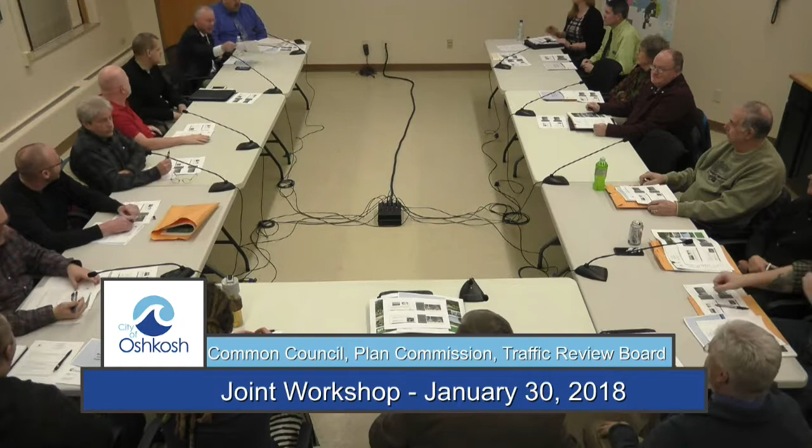James, why don't you kick it off? All right, James Robbie, Director of Public Works. Mark Roloff, City Manager. Jim Collins, Transportation Director. Dan Szynski, Traffic Review Advisory Board. Steve Haas, Traffic Review Advisory Board. Michael Ford, Plan Commission. John Kiefer, Plan Commission. Jake Krause, City Council. Caroline Pansky, City Council. Steve Cummings, Mayor. Alan Davis, Community Development Director. John Hens, Plan Commission. Tom Forty, Plan Commission. Bob Viger, Plan Commission. Tom Perry, Plan Commission. Kathy Prop, Plan Commission. Ross Hohenschneider, Advisory Board. Steve Godey, Assistant Director of Public Works. And Kelly Groyle, KL Engineering.

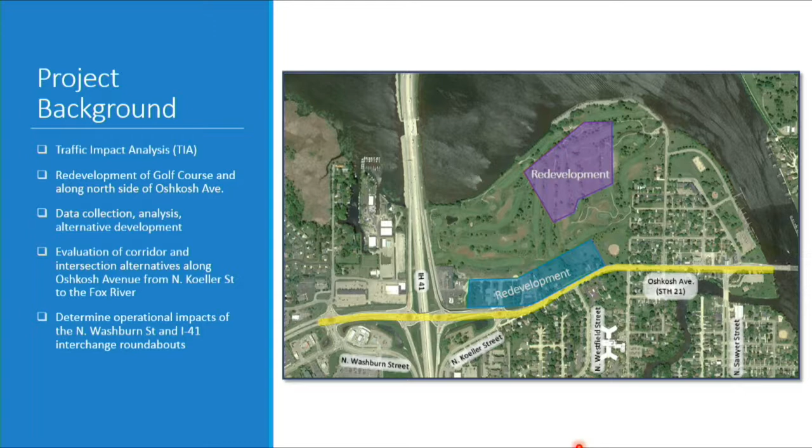In this case, we collected intersection movements or volumes from Washburn all the way to Sawyer Street for the roundabout and signalized intersections. That's why we're here today, to go through some of those alternatives we looked at and get input from you guys. Our focus for this meeting will be from the Koeller Street roundabout to the Fox River. We did look west, but the connecting highway limits are just west of Koeller Street, so we're going to focus on those corridor alternatives and intersections. But if you guys do have questions regarding the other roundabouts, we can address those.

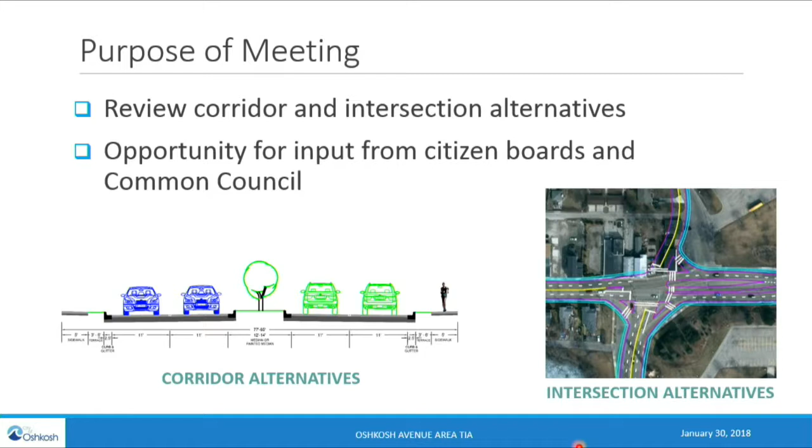So as I mentioned, the purpose is to review these corridor and intersection alternatives that are in your handout and also on the presentation slides, and have an opportunity to get your input and thoughts about them.

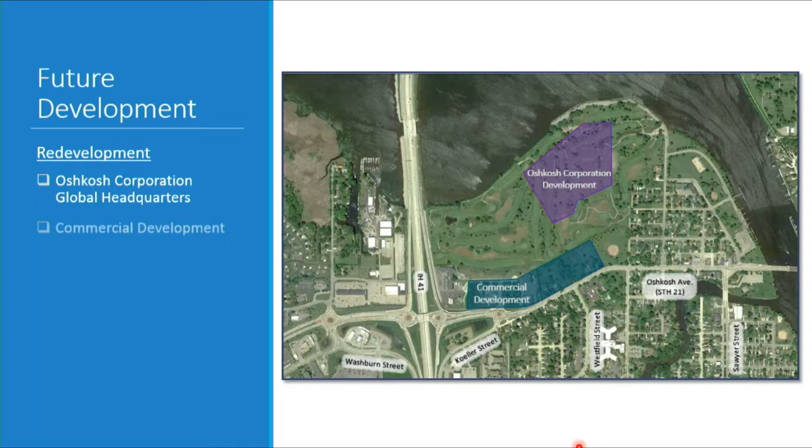To start, just to give a little bit of background, and I think many of you are familiar, the Lakeshore Municipal Golf Course is being redeveloped for Oshkosh Corporation Global Headquarters in part of the golf course area.

There will be some commercial development planned for the north side of Oshkosh Avenue. As part of this, to feed into those development areas, there'll be an extension of Koeller Street and also an addition of a north leg at the Westfield intersection. Other than that, it's not anticipated that there would be any other driveway accesses along Oshkosh Avenue to serve these new facilities.

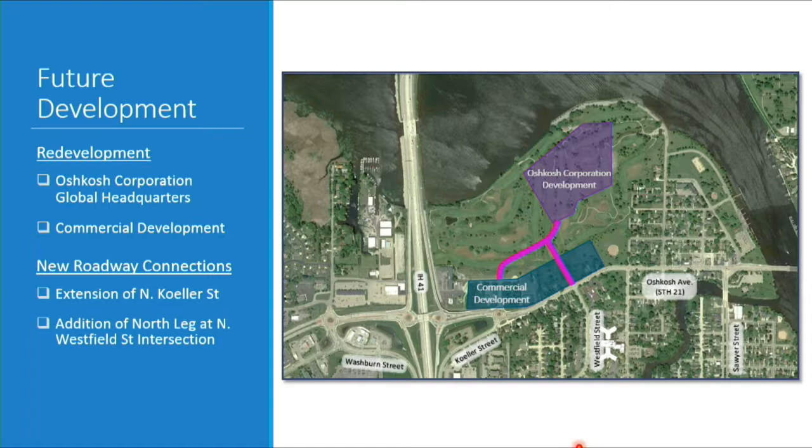To give you a background of what we've done to date, we have worked with East Central Wisconsin Regional Planning Commission to come up with background growth traffic volumes. This would be traffic growth in the area that's not a result of the new development in the northeast quadrant of the interchange—other development in Oshkosh or just the growth of the municipality through time.

So we gathered their data. They have models that help predict what is expected for the future. KL Engineering then looked at the development itself with Oshkosh Corporation headquarters and the new commercial development, and used industry standards to predict traffic volumes that may be generated as a result of this development, and then assign trips to the intersections in the network as people exit and enter these new areas, and how that will impact the roadway system.

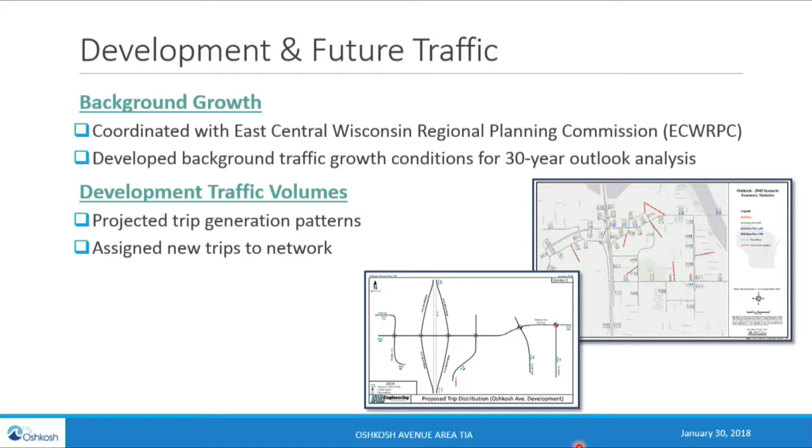From there, once volumes are determined, we do a traffic analysis. We look at AM and PM peak hours, which are generally the highest for the day. We analyze the existing with current roadway conditions and current volumes. Then we looked at development completion, which should be between 2020 and 2025, with some of those corridor improvements, and then the horizon year, which in this case was 2045.

So we modeled with and without development traffic to see what kind of impacts it would have to the roadway system. And as we mentioned, the intersections that were evaluated were from Washburn to Sawyer Street intersection, the signalized and roundabout areas.

Do you have specific times, the peak times that you analyzed? What we did was we had video cameras out there and ran them all day, and what we found to be the AM peak was from 7 o'clock to 8 o'clock in the morning. That's a general figure—each intersection might be slightly different, but for the corridor itself, it seemed to be 7 to 8 o'clock and 4:15 to 5:15 at night.

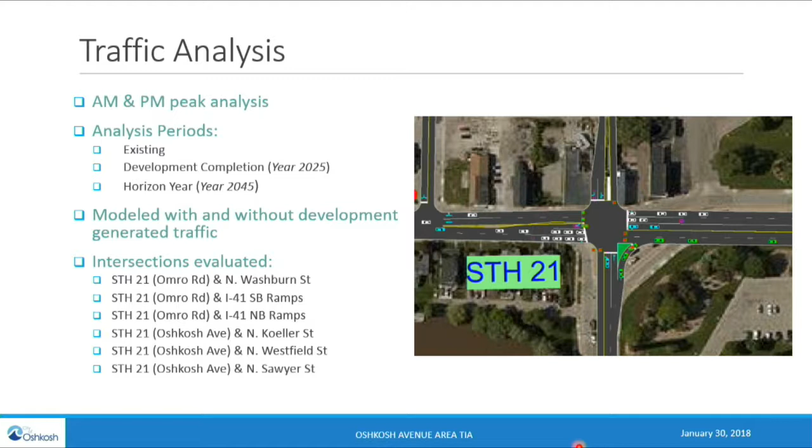So that's the background. Is there any other questions before we dive into the corridor alternatives? Okay.

Before we start here, in your packet handout or on the slides, if you are following along, we provided basically a one-page sheet for each of the alternatives. So if you are interested in following along, this would be page 1 of the corridor alternatives. What I tried to do here was provide an easy way that you could look at the typical section, some example pictures.

I tried to get something close to what that corridor might look like, and then look at performance measures. You don't want to just look at operations, but consider safety and access and just the feasibility of these alternatives. So I'll try to hit on a little bit of that, and feel free to stop and ask questions along the way.

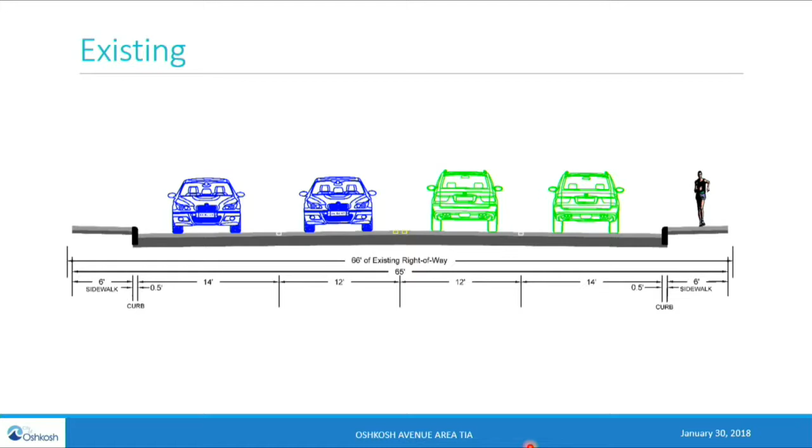So to just start from a base point, we have the existing corridor. We have a 66-foot existing right-of-way with 12-foot inside lanes and wider 14-foot outside lanes. There's currently no gutter along there, just a curb and then sidewalk that directly is adjacent to the roadway.

Here's some pictures, just looking at—I know they might be hard to see—but basically you have your 66 foot, and like I mentioned, you have your sidewalk right up to the roadway, which provides some limited space for snow removal and comfort to pedestrians.

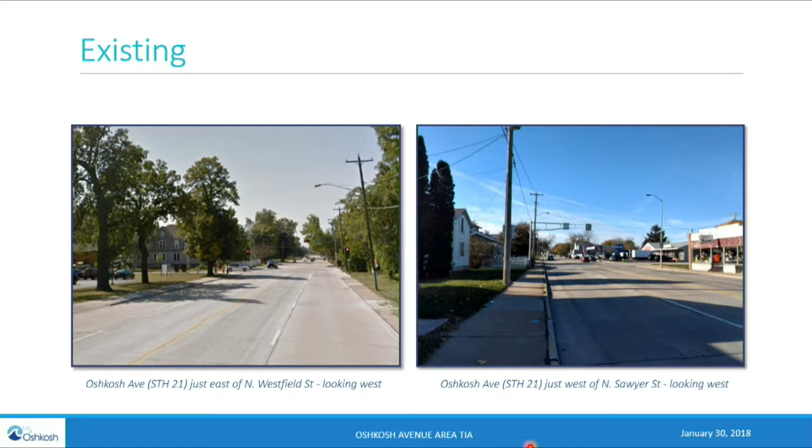Looking at some of the performance measures as far as operation goes, with 2 lanes in each direction, it appears to have sufficient capacity for through vehicles now and in the future.

But it does have some disadvantages. There are no separate left turn lanes along the corridor that can cause delays to vehicles, and this can result in poor lane utilization. Sometimes what we see is people hang out in the outside lane to avoid having to shift over if there's a left turner in the inside lane.

And also with the interchange to the west, there is a desire to be more on that outside lane, so we're not seeing the utilization of the inside lane as much as we might like to see.

As far as safety goes, a 4-lane undivided section tends to be the least safe out of your traditional corridor alternatives. The main reason is a higher crash potential—you tend to have more conflict points, so more possibility for an occurrence of a crash.

In addition, the speed differential can be an issue as people slow down to turn left or right into different driveways or intersections, which can create rear-end collisions and things like that.

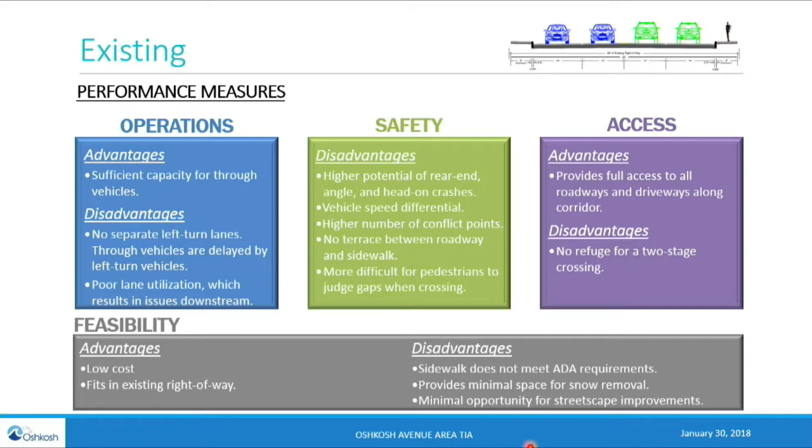Overall, the feasibility of this alternative is it's low cost or no cost—it's out there today and fits in the existing right-of-way. Disadvantages would be the sidewalk not meeting ADA standards, minimal space for snow removal in the corridor, and minimal opportunity for streetscape or aesthetic additions.

So we evaluated some improvements we could make, starting with keeping that 4-lane undivided section but enhancing the current typical section. Basically, we'd narrow the outside lane to an 11-foot lane and provide curb and gutter. Depending on right-of-way and desire, you could put a 3-foot to 6-foot terrace in there and then provide a sidewalk to give that gap to pedestrians.

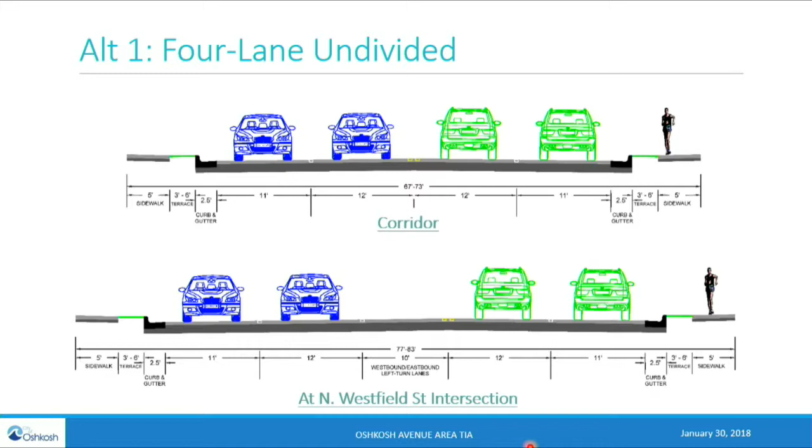We'd also recommend installing a left turn lane at the Westfield intersection to separate that traffic from the through movements, especially with the redevelopment to the north. And to the south you have the high school and things like that, where a left turn lane might be beneficial.

Here's a picture of Algoma and Murdock in Oshkosh—many of you might be familiar with this intersection. It gives you an example of what it might look like, especially at an intersection where you have a left turn lane provided. You would need a little bit more right-of-way there and a terrace separating the pedestrians and the roadway.

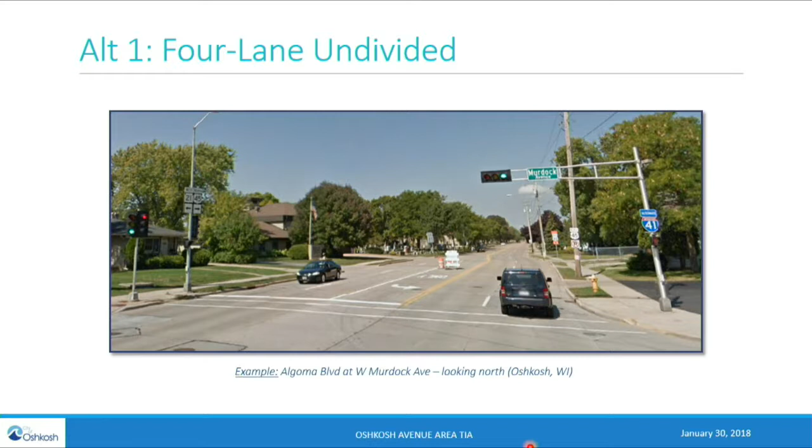Overall, as far as performance measures, it's very similar to the existing, like I talked about. The benefits or differences between this and the existing alternative would be the addition of left turn lanes at Westfield and the buffer terrace between pedestrians and the roadway. It would still provide full access to all driveways and intersections along the corridor.

As far as feasibility, it would be moderate cost. You would have minimal impacts to the right-of-way unless you wanted a bigger terrace, and it's sufficient for pedestrian accommodations. The only disadvantages would be the extra right-of-way needed near the Westfield intersection for those left turn lanes, and still minimal opportunity for streetscape.

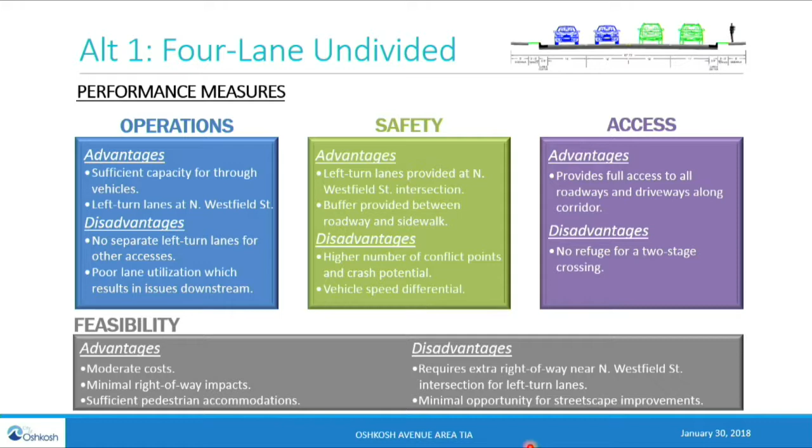The second alternative we looked at was the two-way left turn lane, or TWLTL, from Koeller to Eagle Street. With the traffic volumes out there today and anticipated for the future, you would still need 2 lanes in each direction, so a 5-lane TWLTL would be the typical section you'd see out there.

What this alternative provides, if you aren't familiar, is 2 lanes of traffic in each direction and a center lane that allows people to turn left. So if you're driving down and want to turn left at a driveway, you're able to shift over into that lane and make that maneuver. It can be utilized for both eastbound and westbound traffic.

With this, we'd still recommend a terrace and then your sidewalk. From Eagle Street to the Fox River, the right-of-way is a little bit more constrained in that area and might not provide an opportunity to obtain right-of-way that's more than what's out there today.

In this area, we would look at a 3-lane TWLTL with 1 lane in each direction. The daily trips along this section of the roadway are a little bit less in this area, so this might be a feasible alternative to reduce your through traffic in each direction to 1 lane, with the TWLTL or turn lane in the middle. By doing this, it provides a lot of extra space for a terrace and some of those more aesthetic options.

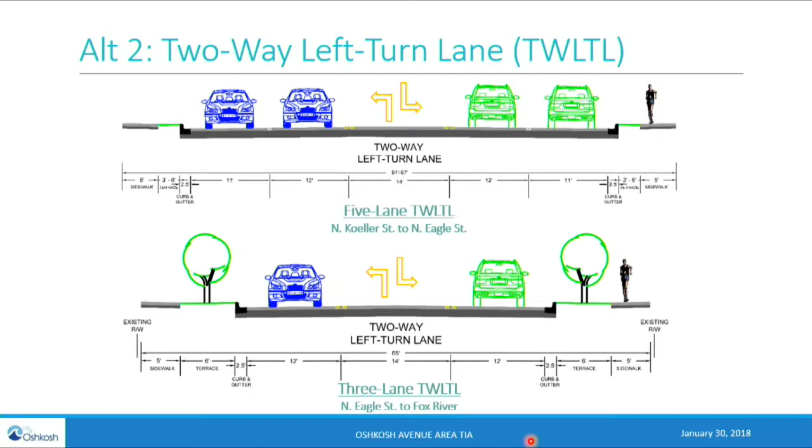Are there more accidents when you're going from the 5 down to the 3 when they're merging in? Is there? Good question, and that's something that's on the next slide too. That transition can be a little bit difficult. I wouldn't necessarily say it's a safety issue, but it just can cause confusion or add a little bit of complexity to it.

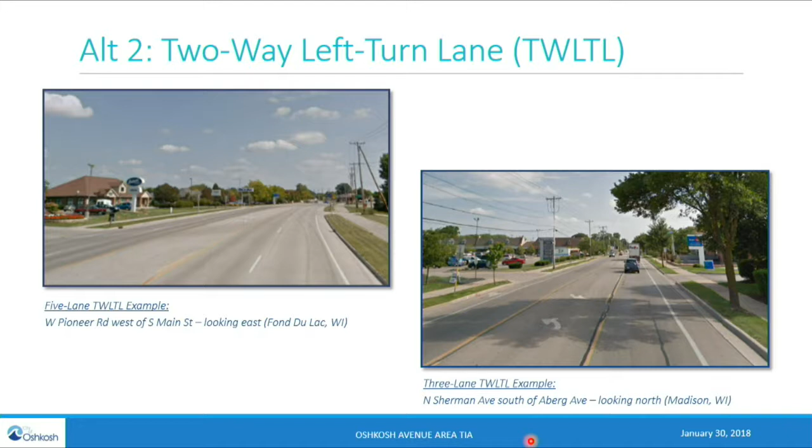So looking at operations for this compared to the existing 4-lane undivided, the big advantage to this is it provides a left turn lane for all accesses. So basically, your through vehicles are never stopped or slowed by left turn vehicles waiting to make their maneuver. This in turn provides better lane utilization.

The only disadvantage to this, and it alludes to the question that was asked, is the reduced capacity in the 3-lane section. If the volumes increase more than what we are expecting, that could create some additional delays, and then it does create more poor operations at the North Sawyer Street intersection than what we typically would like.

As far as safety, this alternative is safer than the 4-lane undivided section. The main reason is because it reduces some of those conflict points by separating those left turns out. In addition to that, it reduces your speed differential because now as vehicles slow to make that maneuver, they're in a separate lane.

Advantages to this alternative is that it still provides full access along the corridor, and studies have shown that it has made it easier for side street traffic, your unsignalized intersections, so at Fox Street or Eagle Street, for those side street traffic to enter Oshkosh Avenue. It might not decrease their delay that they're seeing, but you can cross kind of one direction of traffic at a time.

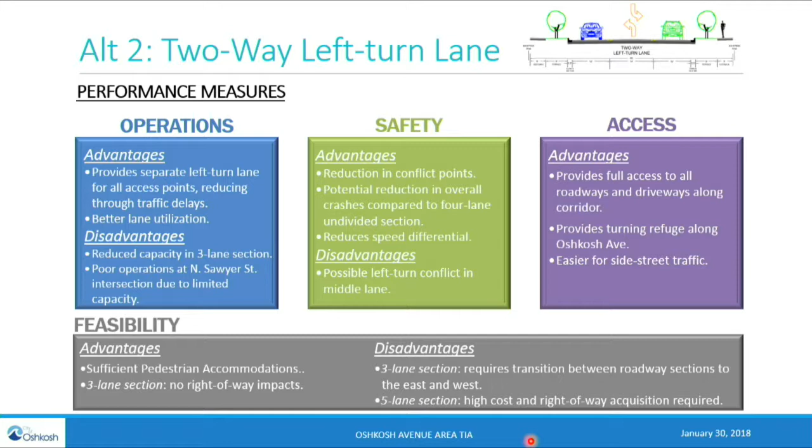The last alternative we looked at was the 4-lane divided section. Knowing, again, of the right-of-way constraints from Eagle to the Fox River, this would only be feasible from Koeller to Eagle Street. What we would do here is provide a 12 to 14 foot median in the center of the roadway. This can really provide a nice gateway to a community and the ability to plant some trees and separate traffic, making it a more aesthetically pleasing roadway corridor.

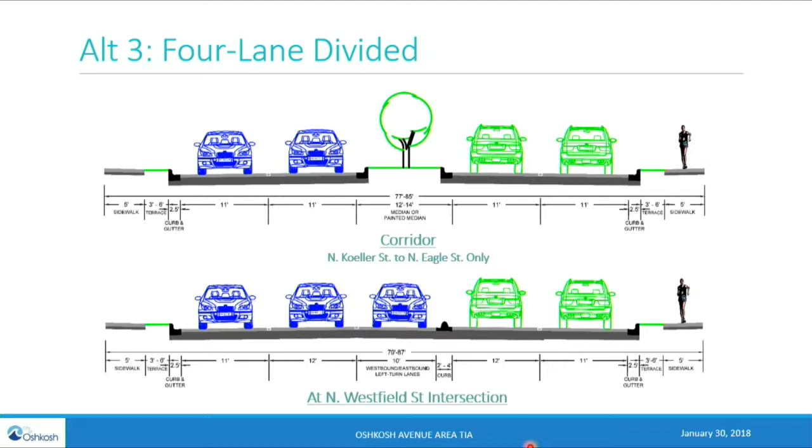Then at intersections such as the Westfield intersection, what you would do is take that median space and utilize it for a left turn. You then would have a small section, and depending on how much right-of-way you'd want to provide in this area, you could do a short 2-foot curb, or you could provide a nice 4-foot median and have the ability to put a traffic signal or other things in there too.

So here's some examples. As I mentioned, the one on top, you can see this is in Monona, Wisconsin. They have some nice trees growing along the corridor, and then at the intersections you can have just a narrow curb strip, or again you can provide more of an actual median, with a little bit more right-of-way at those areas.

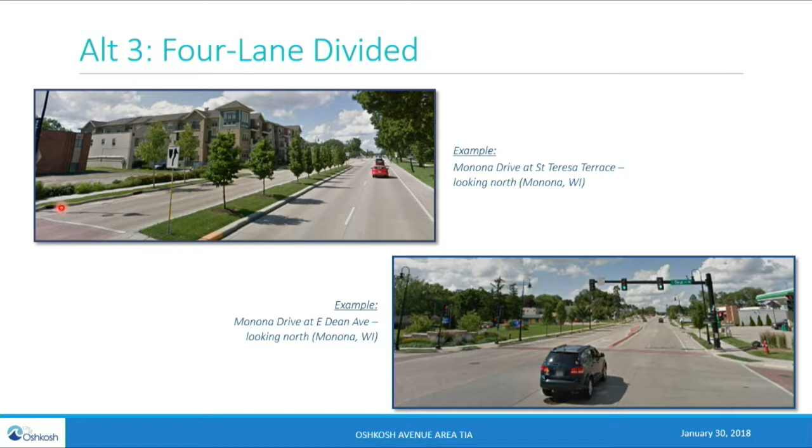As far as performance measures go, this is optimal capacity for through vehicles. It limits your access points, which I guess can be looked at as a positive or a negative, and it basically focuses on making sure people can get through the corridor. There would be left turn lanes at your major access points, which would also increase operations.

The disadvantage would be, specifically for the south side of Oshkosh Avenue, to enter those properties you might have to increase your travel time. You'd make a U-turn at, say, the Koeller Street roundabout to access those properties if you're going the opposite direction.

As far as safety goes, this is the safest alternative. It's the least likely to have head-on or angle crashes, even rear ends, and especially the angles and head-ons, which are generally the most severe type of crashes you would see.

And then lastly, as far as access goes, it does provide access control through the corridor, but with that increased safety, you do cause some inconvenience for some of the driveway accesses.

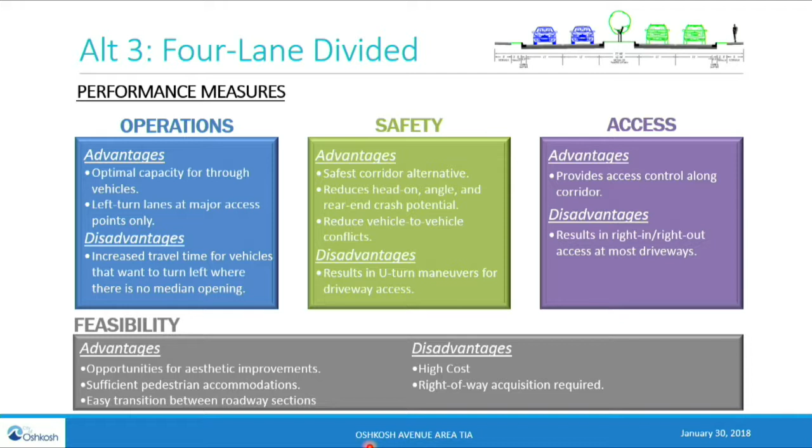So that was all the corridor alternatives that were looked at. Was there any questions before we dive into some of the intersection stuff?

Right-of-way, is there opportunity for obtaining more right-of-way, short of buying homes or something like that, radical?

In conjunction with the redevelopment on the north side, there may be some opportunities that would need to be more fully explored as we move through potential implementation here.

So like from Koeller to about Eagle, with all the redevelopment taking place on the north side, you could carve right-of-way out of the north side. The developers don't want to hear that, but there may be some opportunity to potentially trade some land that way as well. If we need a little bit, if we got a little bit on the backside, there may be some opportunities there that just need a little more exploration to determine their feasibility.

But initially it looks like we could probably go to the north side with the right-of-way, but right now the street is basically paved to the max of the right-of-way. It's paved right-of-way to right-of-way, from back of sidewalk to back of sidewalk - that's the complete right-of-way.

Just curious as to why there are no recommendations for bike lanes in any of the feasibility study. I don't know if that was Public Works' end or if that was something you weren't asked to do. I just think it could have been included - it would have been nice to see an option in there.

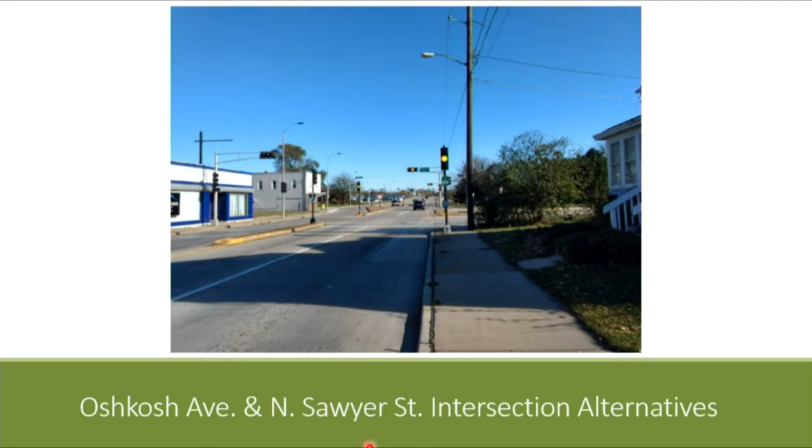Keep going. Okay, excellent. Moving on to looking at some of the intersection alternatives, starting with the Oshkosh Avenue and Sawyer Street intersection.

Basically, if you're going eastbound on Oshkosh Avenue, you're going through 2 signalized intersections. If you're going eastbound and turning right onto Sawyer, you have a traffic signal and a yield sign you have to maneuver. For drivers who drive this every day, maybe it's not so confusing, but the first time I took a look at this, it was a bit of a head scratcher.

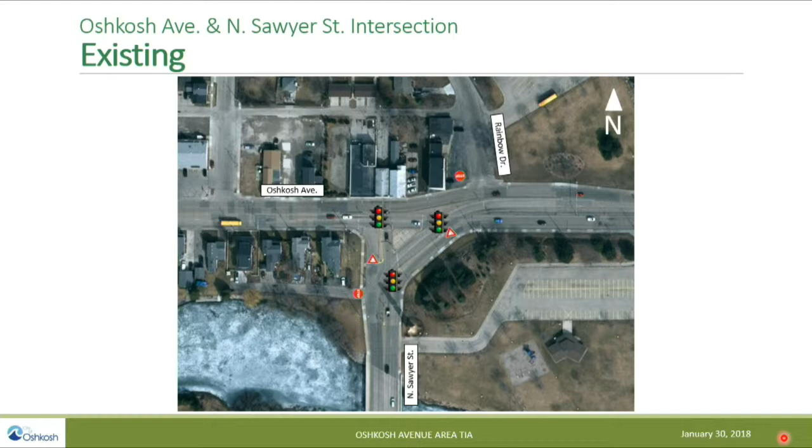The disadvantages would be the connectivity between the north and south side of Oshkosh Avenue. If you are on Sawyer Street, you have no ability to get to Rainbow Drive with the current intersection. You would most likely have to turn left to go to Fox Street and go through the neighborhood in order to get to Rainbow Park, the boat landing, or other properties in that area. Same with eastbound Oshkosh Avenue - there's no way to get to Rainbow Drive directly from this intersection as it stands today.

Some of the advantages to this alternative is, again, no or low cost because it's there today. It fits in existing right-of-way, and it is fairly compatible with the lift bridge operations. The disadvantages would be the complexity of the intersection with multiple signals and traffic control devices, and it not meeting current intersection control and pedestrian standards.

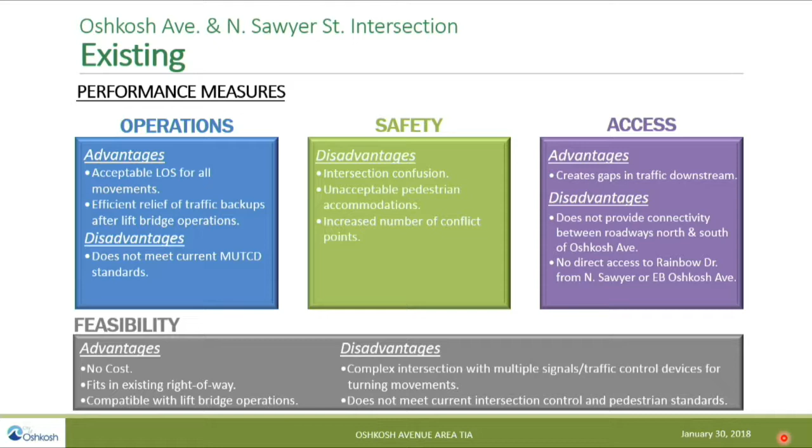So the first alternative we looked at was maintaining the overall geometrics of the intersection the same, but providing one signalized intersection - bringing all those signals and traffic control into one location.

Some of the advantages to this would be that it would provide fewer conflict points, provide a more conventional crossing for pedestrians, and improve driver expectancy as a result of that.

I'd like to note too, going back to the conceptual drawing, based on our traffic volumes today and in the future, we believe we could get away with a single left turn lane. Right now there are 2 westbound left turn lanes. This could provide an opportunity - I know it's not shown here - to reduce Sawyer Street to 1 lane going southbound, because about 750 feet from this intersection it's already a single lane. This would provide some sort of bike facility along Sawyer Street, since you would not need that second lane for vehicle traffic.

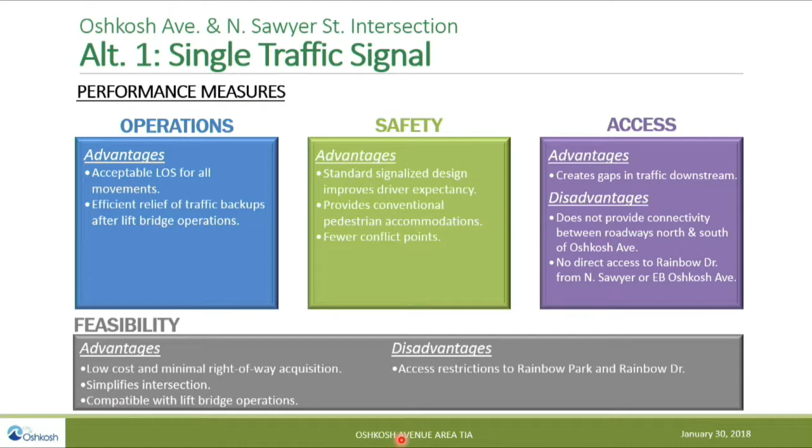Some of the advantages to this is it would be lower cost with minimal right-of-way impacts. It simplifies the intersection, and like I said, it's still compatible with the lift bridge. The disadvantage is it doesn't solve the problem of the connectivity between the north and south side of Oshkosh Avenue.

So the second alternative - we have several different options in Alternative 2. Basically, the difference between the 3 of them is based on what sort of property acquisition would be required to make this work, so we just wanted to show several options. There might be other options out there depending on what right-of-way acquisition the city would be able to obtain if they were to acquire some of these properties.

Going through them one by one, 2A - basically all these look at extending Sawyer Street to the north. This one would extend Sawyer straight up to Graham Avenue and connect in. What this would do is the existing Rainbow Drive south of Graham would go away. You could put green space there, or provide whatever the city was interested in doing with that space. The advantage to this would provide more of a traditional intersection design, more pedestrian friendly. The disadvantage would be that it would require acquisition of the 2 duplexes north of the alleyway.

The second one we looked at would try to minimize some of those impacts by extending Sawyer Street to the north, but then tying into the alleyway to the boat landing and the rest of Rainbow Drive. This would reduce your right-of-way impacts possibly - you would still impact the bait shop in that corner and the bar, but it would reduce some of those other impacts. The disadvantage is that it does require vehicles to maneuver 2 intersections about 175 feet away from each other, which can be a little more difficult, especially with trucks with boats and things that might be accessing the boat landing.

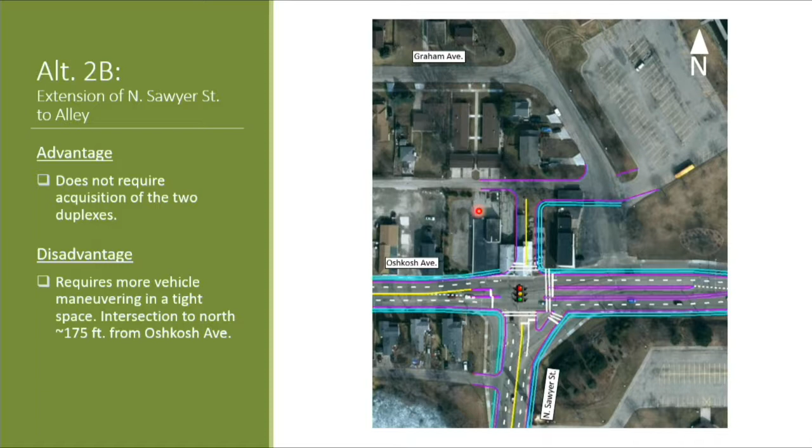One thing else I'd like to note with all these alternatives is your eastbound left turn lane. So this turn lane here, in order to fit that in with the current right-of-way constraints of having to be back on the existing right-of-way by the time you get to these properties, might be a little bit challenging. You'd be able to provide a little bit of a turn lane, but not a desirable one, but at least get those vehicles out of traffic. The city already owns these 3 properties here, so that makes it a little bit more feasible to obtain this type of design.

So looking at performance measures of this alternative, with the combination of Rainbow Drive and Sawyer Street being one intersection, we still have acceptable level of service for all movements, and you would still be able to provide efficient relief of those traffic backups after the lift bridge.

Some of the disadvantages would be the limited eastbound left turn storage, and some possibility of issues with some of those left turn maneuvers. As far as safety goes, again, this would provide more of a standard intersection, provide for those pedestrian accommodations. The only disadvantage would be some of the offset or skew that might occur based on what properties were obtained to create this design.

The big advantage for this alternative would be the access. You now provide direct access to and from Rainbow Park in all directions. You still provide those gaps in traffic for the unsignalized intersections along Oshkosh Avenue. And as we talked about with alternative 1, you would still be able to provide that bike lane along Sawyer Street and connect up and reduce to 1 lane southbound along Sawyer Street after the intersection.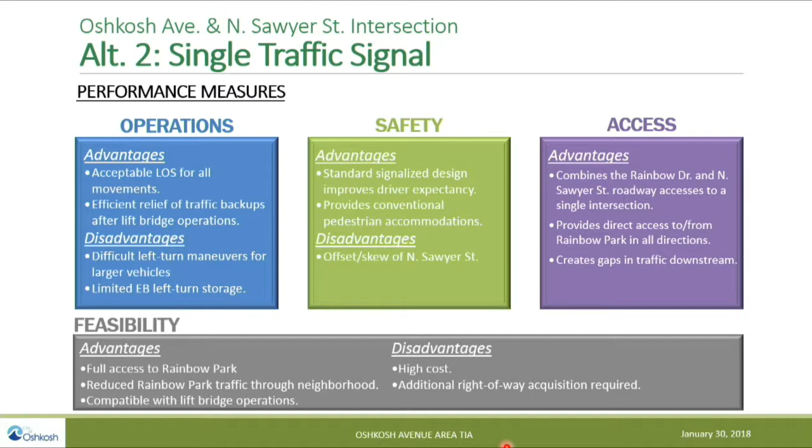The last alternative that was looked at was the roundabout. From an operational standpoint, with everything going on in this intersection and the unique geometry that's there now, the roundabout alternative looked pretty appealing. Then you start talking about the constraints to the south and the lift bridge to the east, and it gets a little bit more difficult.

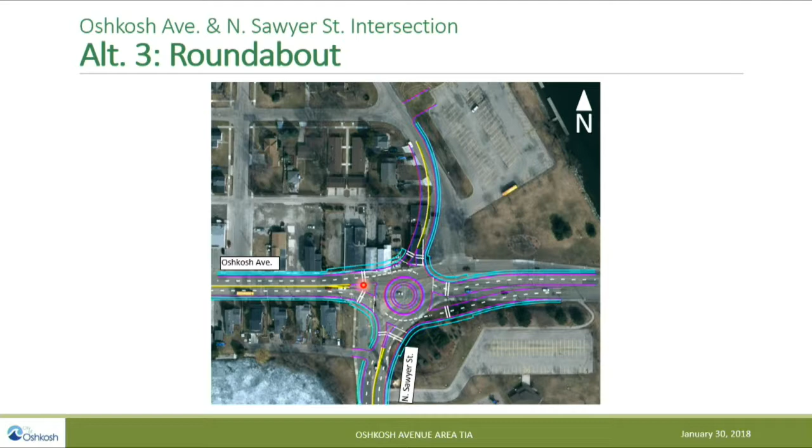Again, if we did put a little bit smaller footprint of a roundabout in here, it can be a little bit more difficult for larger vehicles too.

As far as safety goes though, roundabouts are typically safer than signalized intersections. You eliminate your left turns, which are your high severity crashes, and you reduce your conflict points.

The disadvantage is that it's sometimes a little bit less friendly for pedestrians because there's no pedestrian signal to help guide them across the intersection. Also, as far as ADA goes, if you have a blind person using the facility, generally it's a little bit more difficult for them to hear what's going on with traffic around them.

Advantages, it's similar to Alternative 2, where we now provide access to both the north and south side, but the disadvantage would be that we would not have that opportunity for gaps along Oshkosh Avenue for the side street traffic.

As far as feasibility goes, I think the challenge is the lift bridge and really making that work. That kind of prohibits this alternative from being viable.

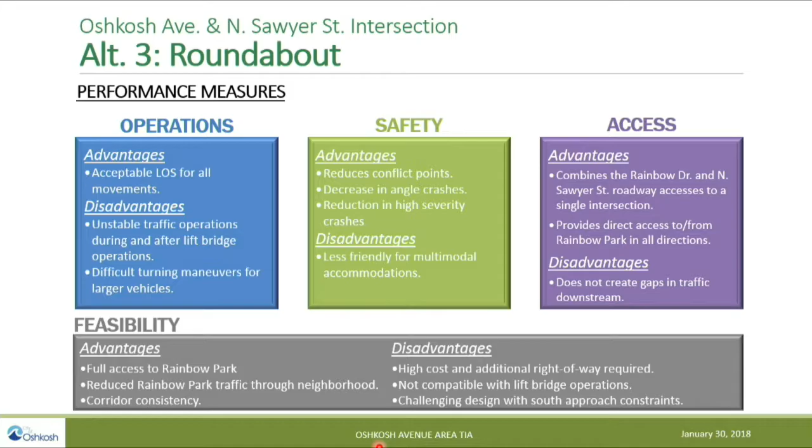That was everything with Sawyer Street. I don't know if anybody had any questions to start off. I've been wondering about the traffic projection. You said you did it, but we haven't heard about it. So is it going to be 50% again as busy, or how does the traffic projection fit with these various alternatives?

So what I don't know is the exact percentage that it increases offhand. I apologize, but basically all of these alternatives were modeled and analyzed to ensure that predicted future traffic volumes would operate at a level of service C or better.

So just to backtrack, this level of service is basically a kind of letter grade, similar to what you would see in school, A being the best, B, C, D, E, and F it goes down to.

Overall, our goal, and the city's goal, is to maintain a level of service C or better, and I believe that delay is about 25 seconds per vehicle.

Kelly, that was in the horizon year, correct? Correct, not in the current condition, but in the horizon year, 25 years out. So if we had anything less than that level of service up until the horizon, it would slowly decline to that, assuming the traffic patterns grow as estimated in the modeling. That was our goal as we established the protocol for the analysis: in that horizon year, 25 years out, we didn't want to drop below a level C.

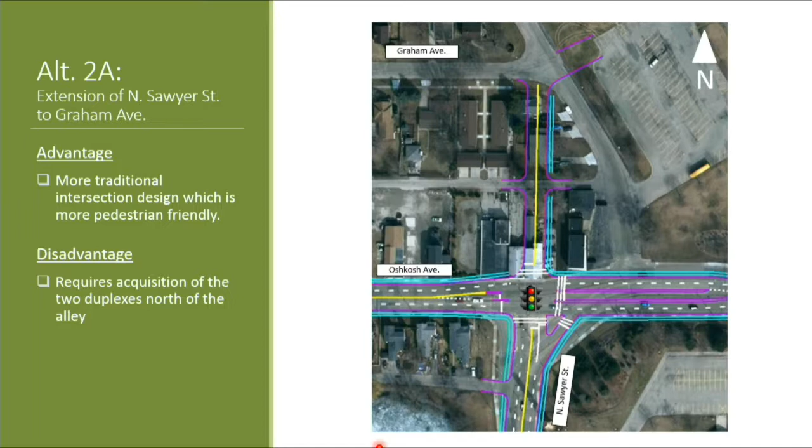This is more a question for city staff, but how do the property acquisitions you've already made help that intersection? It doesn't look like it really, except for one option, so it doesn't really look like it's done a lot. Do you need to buy more? It basically allows Alternative 2 or 3 to work. It provides the opportunity to make that connectivity between the north and south side. Without those properties, you're kind of stuck at Alternative 1. So it does help, but not all the way to complete the intersection. We'd have a straight shot no matter what? Not without getting more of them, yes. But it helps somewhat.

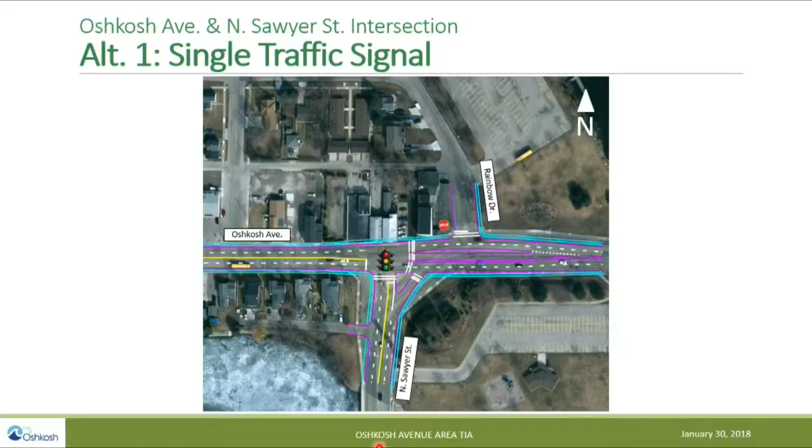Okay, thanks. I got a question about that. There's a lot of daily discussion on Facebook about the Reps Tavern, whether the Suplees bought it, or the city bought it. I'm glad you asked. The Suplee sale did not happen. When we became aware of it, we'd been looking at this long-term. We've presented an offer to the Reps, which they've accepted. It's subject to council review, and we'll be presenting that to council within the coming week. So the right-of-way issue will effectively be addressed regardless of what option is selected by the council. But thank you for asking.

And Jim, you wanted to maybe answer Kathy's question. I just talked to the DOT about that roundabout the other day, and during peak hour it can get all the way down to a level of service of E, but that's only during peak hour.

At Keller and Ninth, there are some issues during peak hour because of lane utilization, but we looked at different modeling and there's not a lot we can do to improve it right now, based on some of the geometric issues there. Most of the day it's C or better, but there are issues at peak hour.

I don't think Oshkosh Avenue is quite as busy in this area as that 9th and Keller roundabout, but there are challenges there during peak hour. Most people realize that if they've been over there during peak hour. Kelly said this is intended to be a C, so it'll be better than some of the peak problems we're having over there by Walgreens.

One quick question is about boat traffic. We have no control over when we open and close the bridges.

Did you analyze boat traffic for the next 10, 15 years? I think that's the heaviest used bridge because there are more marinas between Congress and Wisconsin. So are you thinking boat traffic would increase as time goes on? As long as the economy is good, yes, it will increase. We did not look at that specifically yet, but that is a good point to consider.

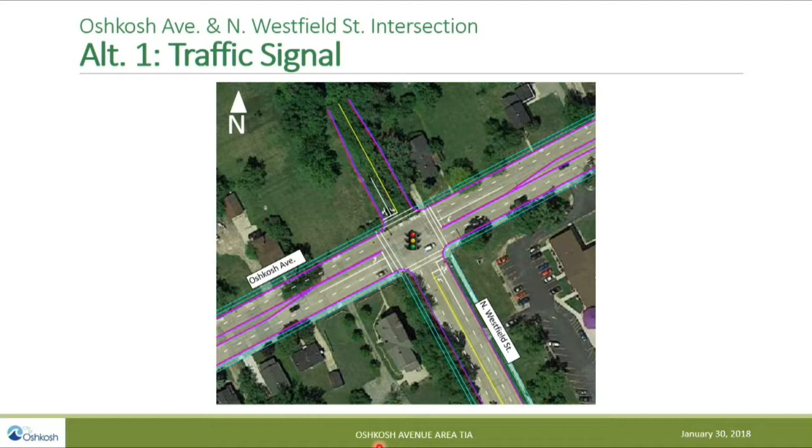As far as operations go, this provides acceptable level of service for all movements, and then provides your left turn lanes that would be desired on Oshkosh Avenue.

Safety-wise, it provides conventional pedestrian accommodations with a pedestrian signal to help people cross the intersection, especially if there is commercial development that might occur that pedestrians might be destined to go to. And then it provides that left turn separation from the through vehicles.

As far as access goes, it provides full access at the intersection still and creates those gaps in downstream traffic for your stop controlled intersections. As far as feasibility, it is a little lower cost than a roundabout alternative and would have less right-of-way impacts. And again, it provides those pedestrian signals.

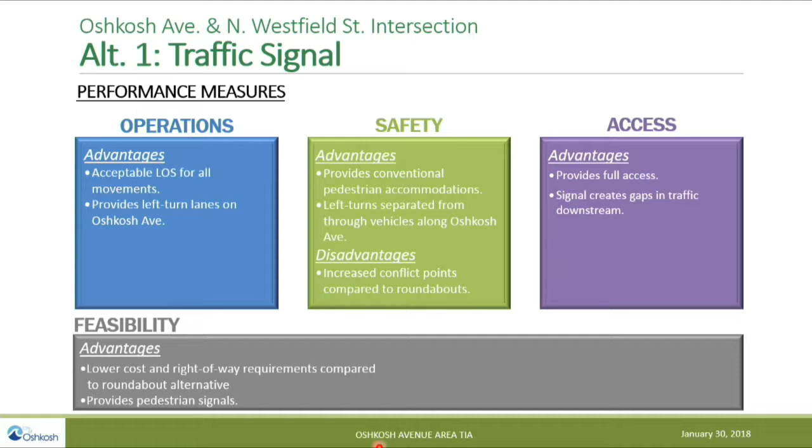The second alternative looked at was a roundabout. Knowing that we'd have more potential for right-of-way to the north, you can see the roundabout was shifted in that direction. As you can see from the picture, this would definitely have a bigger impact as far as right-of-way is concerned.

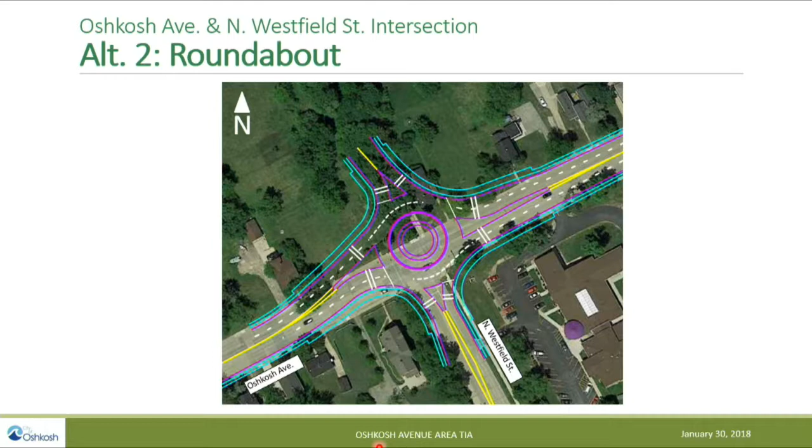Looking at the operations for this, it does have acceptable level of service. It may be a little bit more difficult for those larger vehicles. The big advantage to a roundabout would be that it increases your safety because it reduces those conflict points I talked about earlier. The bigger disadvantage would be the gaps in traffic that the signal would create versus the roundabout.

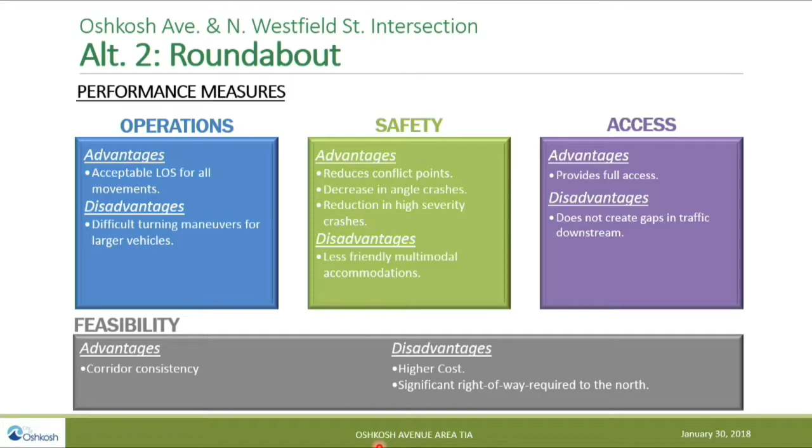Feasibility-wise, I guess you could say an advantage would be corridor consistency to the west—there are roundabouts, continuing them forward. But the disadvantages would be the higher cost and right-of-way impacts. So that was it for Westfield as far as different alternatives.

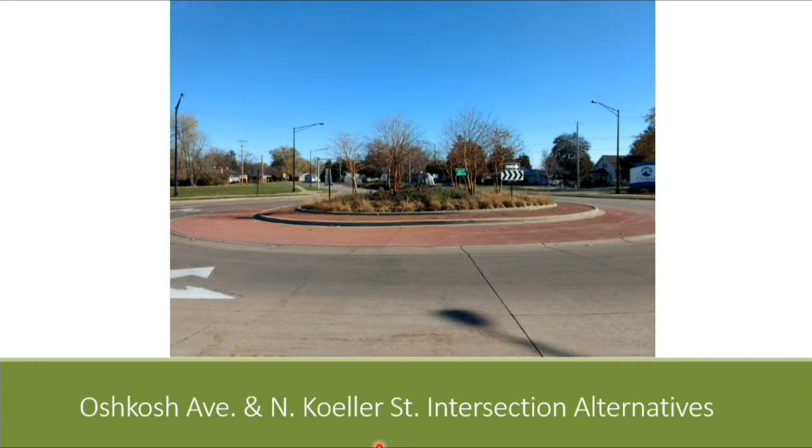Any questions regarding that? Yep. Actually, I have one, this is for city staff. Didn't you—because if you look at the roundabout here—didn't you guys all but tell the residents and the people who live on the south side that you wouldn't need to acquire land on the south side? This looks like it's acquiring quite a bit of land on the south side.

Looking at where all the blue is, it's acquiring a lot of right-of-way on the south side. It looks like it's acquiring real estate from the Davis property where there would be space available, but as far as the residential properties, I believe it's actually relatively close. There may be a little bit in that southwest corner—it's hard to tell with the trees overhanging. I'm just picking the nits that I know are going to come up if this were the one that was chosen. You can again see these jogs to the north before it swings around, and there is right-of-way there.

I'm playing resident's advocate here. It's okay, we're not recommending this one anyways. Okay, well, that's good to hear. And I'll speak for the elderly people at Evergreen Manor—they don't like roundabouts.

Overall, all these alternatives are very conceptual at this point. They're trying to follow the design standards and give you an idea of what something would look like. As far as exact right-of-way needed, this isn't perfect by any means to that level. I would suspect, John, that when we made that statement, we had seen a draft of this and weren't impressed with this option, so it was probably as much a prediction as an assurance.

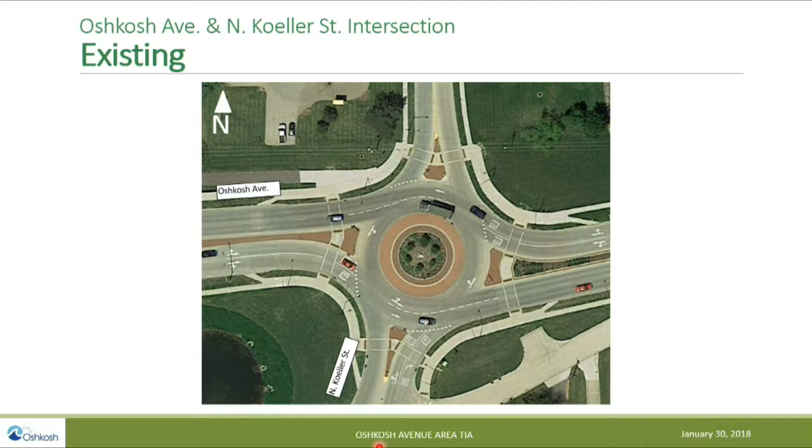Here's the existing roundabout as it is today. Looking at the performance measures in the horizon year with development traffic, we do see some unacceptable level of service for that southbound approach—basically the area that would be coming from the commercial development in Oshkosh Corporation—with some possible queuing issues to the interchange.

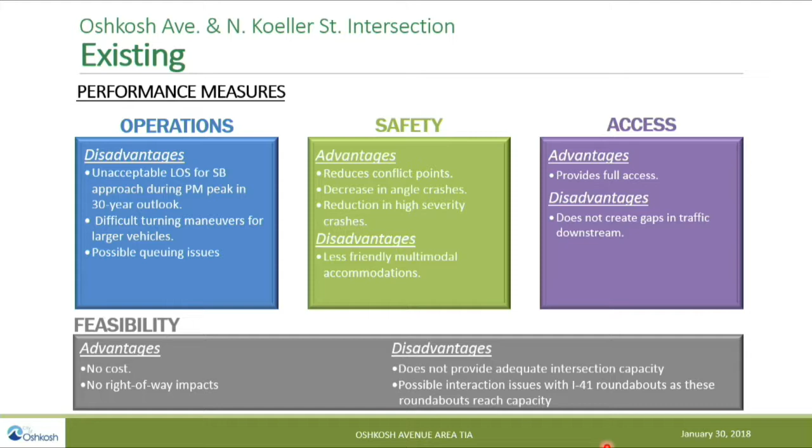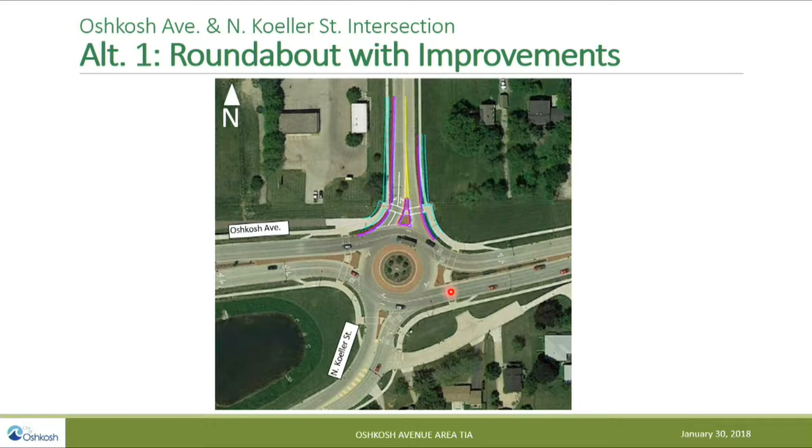We've kind of already alluded to the safety and access advantages and disadvantages of roundabouts, so I'll skip through that. Leaving it as is would mean no cost, no right-of-way impacts, but we wanted to increase the level of service and make it more desirable operationally. So what we looked at was basically just adding an additional lane on the southbound side of the roundabout, providing a right turn lane that could be used to access the interchange and west of the interchange, and then a lane for through and left movements. Overall, this wouldn't require a lot of right-of-way—you could fit this in pretty easily and provide a little bit better operations.

So again, the advantage to this would be acceptable vehicle operations. One thing I'd like to note is as we get closer to the interchange, we are seeing the roundabouts carry more traffic, starting to reach capacity. So there could be, down the line, some possible interaction issues with the I-41 roundabouts as these roundabouts reach capacity with development and other things in the area.

Jim, probably a question for you. Lori's texting, wondering about the crash data that we have. Are there any particular intersections that stand out that need specific attention? Or are we just focusing on what could happen in the future?

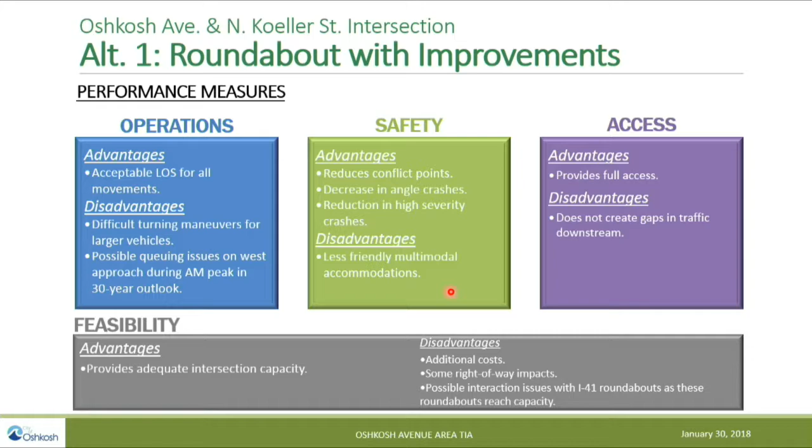Sure, yeah, that area doesn't really have a high crash rate right now. I know I had given Kelly the data and she looked at it as well. So you sent me some stuff. We also pulled some crash data through the Transportal website, which is kind of a second look at it too. For the most part, these intersections that we're talking about all have a crash rate that's less than 1.

And we kind of use that as an indication of a possible crash issue if an intersection has a crash rate greater than 1. For the most part, at least from the Koeller Street roundabout to the east, there are rear end and angle crashes and things, but nothing that's out of the ordinary. Thank you.

Kelly, there looks to be a little bit of possibilities for right-of-way on the south side, on the southern part of this roundabout. Could that help alleviate some of the queuing issues on the west approach over the long term? Possibly. I think some of those issues are more a result of the roundabouts at the interchange hitting capacity, and I think improvements to that area would help more than providing changes to that south approach.

Yeah. Something that comes up frequently with roundabouts, of course, is that they don't create gaps in traffic downstream. And that's a very important problem for people to get in and out of traffic, so something you've got to consider. Impatience today is something that exists. At your higher volume traffic times, there's less and less gap. Right, so it comes up in almost every one of these situations. Something to consider anyway, try not to eliminate gaps.

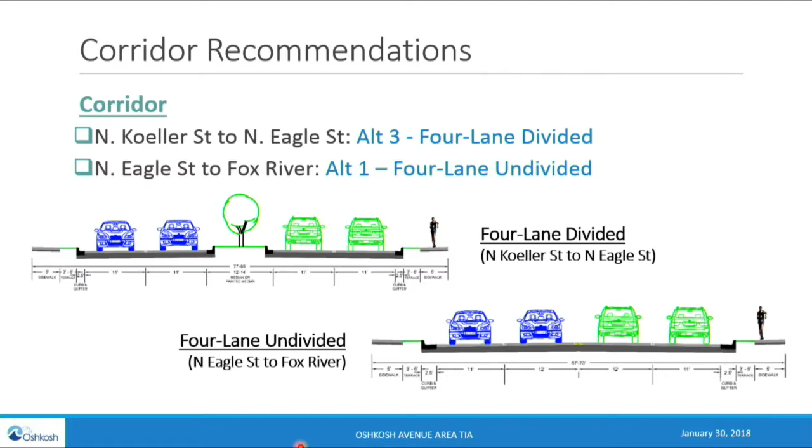And it would only be trees and beautification in the middle, not signs or street signs. For the most part it would just be trees or bushes at your intersections. If you provide a bit more median, you might have a traffic signal or sign there, but along the corridor I wouldn't see any reason you'd need signs.

Yeah, the terrace would be more important for the signs than that. Correct. That's something you talked about too - with the reconstruction, if you can get some terrace, it gives somewhere to put the signs, versus some narrower areas where we have to put the sign into the sidewalk, which isn't really desirable.

And my understanding too is snow removal - some of the snow is getting relocated to other places. The terrace provides the opportunity to store some of that there too. Thank you.

Any other questions regarding the corridor or other inputs? As far as intersection recommendations, at Oshkosh Avenue and Sawyer Street, our preferred intersection alternative would be either Alt 2A or 2C, depending on availability of doing something like this. Extending Sawyer Street, Alt 2B, just going to the alleyway, is not ideal with boat traffic and things like that, so one of the other two alternatives would be preferred.

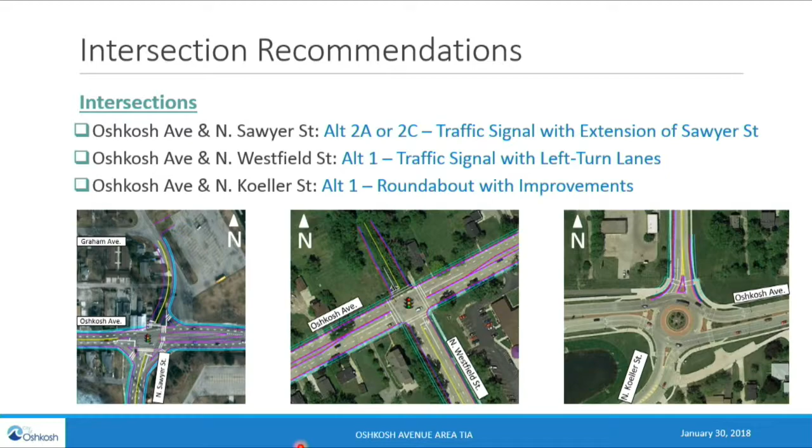But just making it more pedestrian friendly on that north side of Oshkosh Ave with a larger sidewalk, I know it would need more acquisition. But if it's any time to do it, now's the time, especially if what we're doing is trading land with the golf course property. I think this would be the time to do it.

So how wide was the sidewalk on the north side of the corridor? We show 5 feet right now. So in theory, you could make it even 10 feet wide, and that approaches the trail width, if you really wanted to do something like that. So add 5 more feet to the right-of-way on the north side. Yeah, as far as the sidewalk, we maintain standard sidewalk width, but if the city desired a wider sidewalk and was willing to handle the right-of-way impacts that go along with that, that could be a feature that would be added.

Probably jumping ahead of myself, but with the corridor recommendation, if we have green space in the center, could we put electrical in there right away? In the median? In the median. So...

Are you talking streetlights in the median? Is that what you mean? The ability, either streetlights or... I had a meeting with the Convention and Visitors Bureau, and they were talking about doing something more for the holidays to bring more people in. I was thinking, if that becomes landscaping, either small bushes or flowers, could we then put something for the holidays in there that would require electrical?